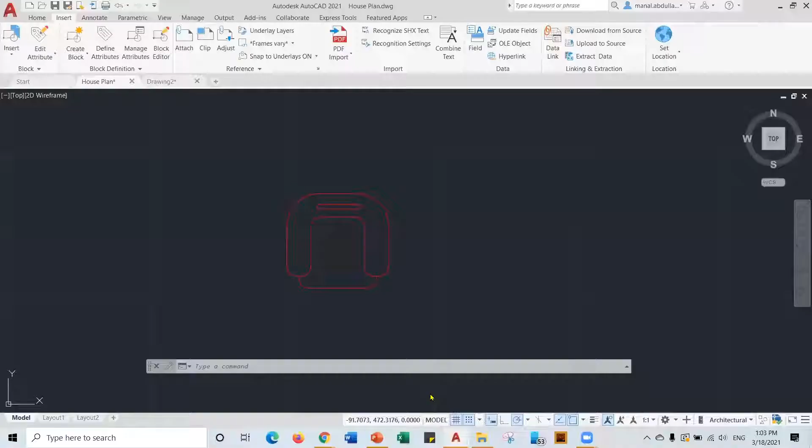At the beginning, I've created here a little armchair, and I need to use this armchair in my house plan, in different rooms. The best way to use it is to copy it, but when we copy it, if we need to control it, like change one of them, we cannot change all of them at once. So having a block means grouping it together into one reusable object, to reuse it in this drawing or other drawings. Let's see how we can define blocks.

The first thing we need to do is go to the Insert tab, and here is Create Block. We have two options: Create a Block, or Write a Block. Create a Block will create a block inside the drawing you are using, so this is a local block. However, Write a Block lets us create a block globally to use with other drawings.

Let's start with the first option, Create Blocks. That opens a dialog box for you to give it a name, so here I'm going to name it armchair. Specify the base point — we have two options, specify on screen or pick points. Let's use pick points, so this is the base point. The base point is any significant point in your drawing; it could be any point, but try to make it meaningful for inserting the block. In this case, I'll use object snap and take the midpoint.

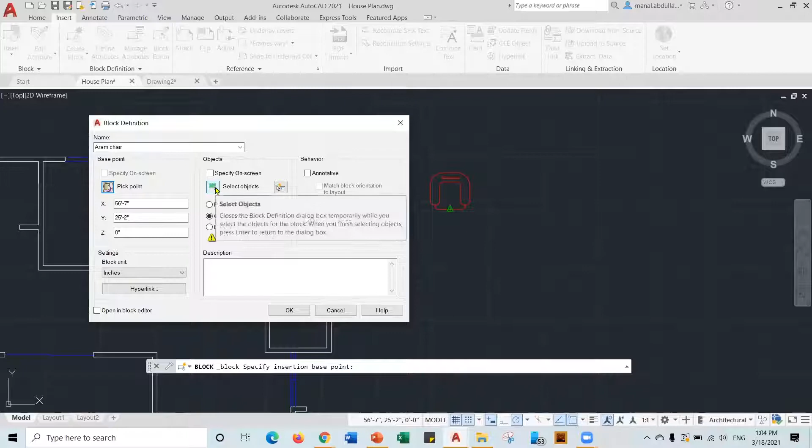Then go to the next option, which is Object — select object. I need to use any selecting method to select the whole segments, the arcs, and everything I need to convert to a block. When I finish selecting, I press enter to finish.

We can change the units. Here the units are inches, but you can change that if needed.

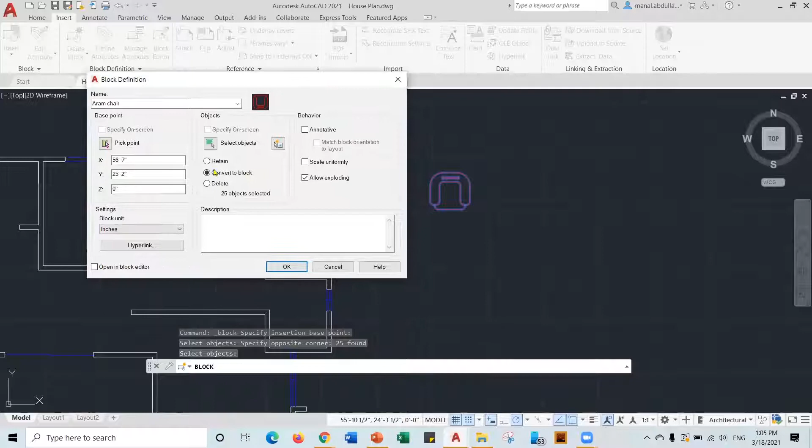Here we have three options. The first option is Retain, which keeps the chair as segments — lines and arcs — so it won't be a block itself, but the system will still create a block for you while keeping this as lines. The second option, Convert to Block, will turn this into a block in the library. The last option will delete this from the drawing and create a block for you. Now, as you see, we have 25 objects selected, with lines and arcs and everything. I'm going to choose Retain, so I'll keep this as lines.

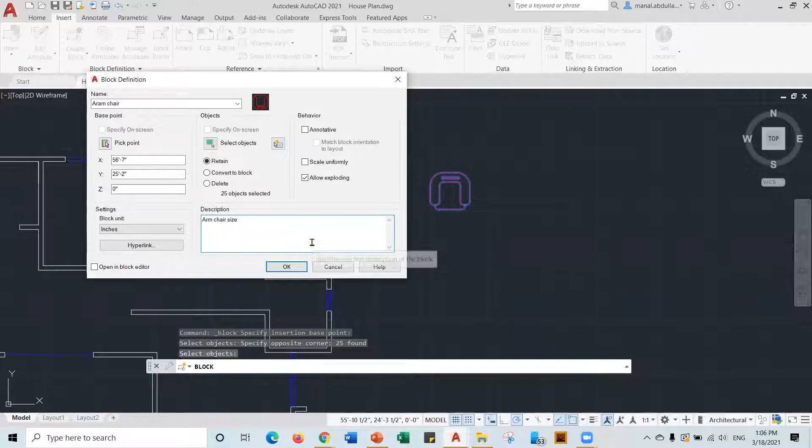You can put any description you want here, like 'armchair,' and you can include size or any necessary information, then click OK.

As you click here, notice that because we chose the Retain option, this is not a block yet. However, if you go to the Insert tab, Insert, here we have the armchair — click on it, drag and drop it into place. Now this one is a block, and you see it has just one grip. However, this one has a lot of grips because it's still made of segments. So now this is a block, and you can insert it as many times as you want.

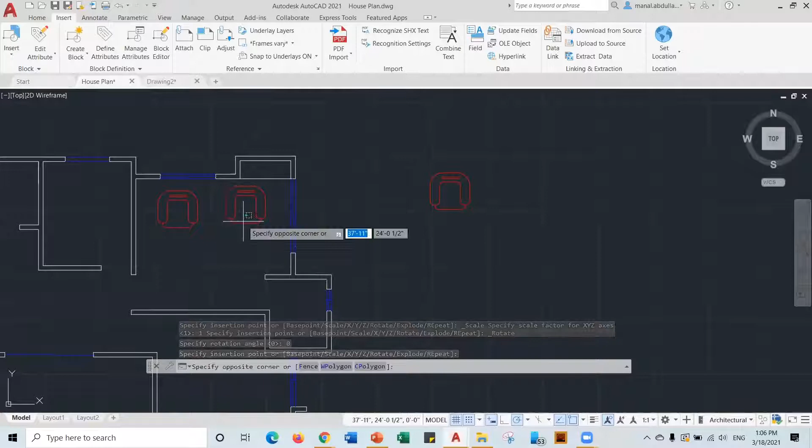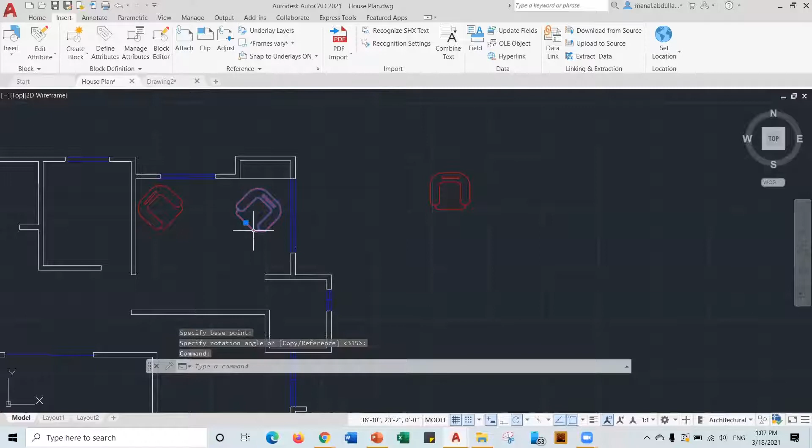Now if you right-click on the block, you have options — you can rotate it. If you need to rotate, you pick a point and decide where you want to put it. You can also scale it, make it bigger or smaller. Let's rotate this one: pick a point, then rotate and select that. You can also move it — from the grip, you can move it up and down. So this is how you can create this furniture.

Now let's say I need to create another block. I'm going to make some changes here — stretch it, open the green window, right-click, and stretch this side. Let's turn that into a sofa. So I'll stretch it and save it as another block.

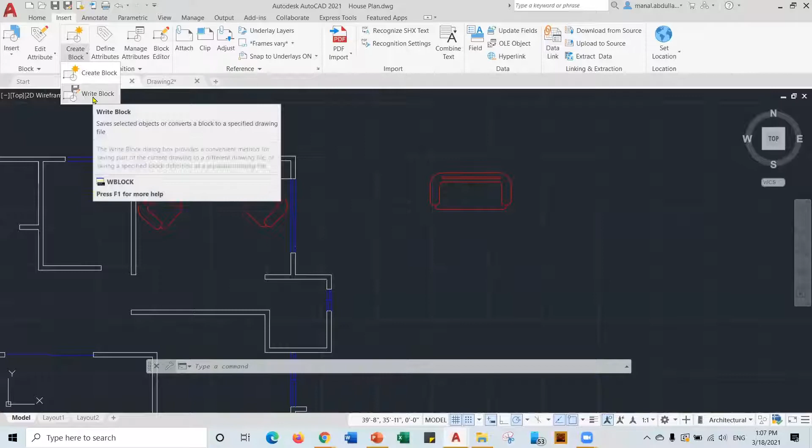Now I'm going to use the second option, Write Block, and let's see the difference. If I already have a block, I can choose the first option. Like if I need to make the armchair, save it as a block, we can make it. If you need to save the entire drawing, you can choose the entire drawing.

Otherwise, you can go to objects and pick a point. This is the base point. Remember, a lot of learners mix up this point. The base point should be a significant point inside the object that you need to insert. Sometimes you pick a point far away, so the base point will be far away and you'll find difficulty controlling the block.

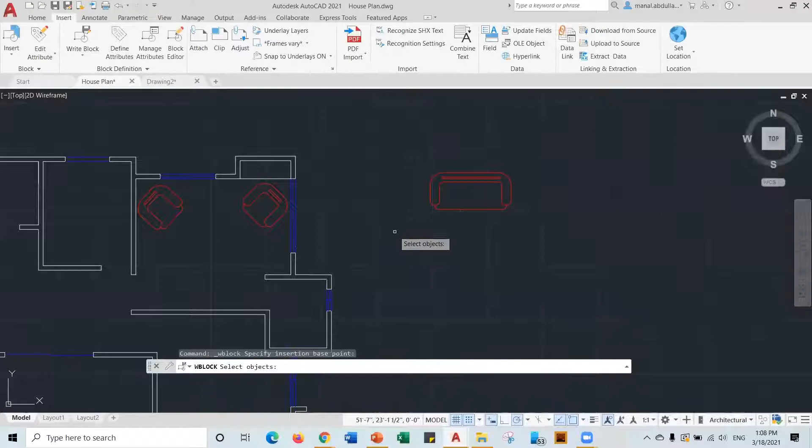So pick a point that's significant to the object. Select the object, select everything, and hit enter to finish selecting. Now again you have retain, convert, and delete. If you convert it, this one will be a block as well. If you delete it, you no longer have this one on the screen, but you have a saved one.

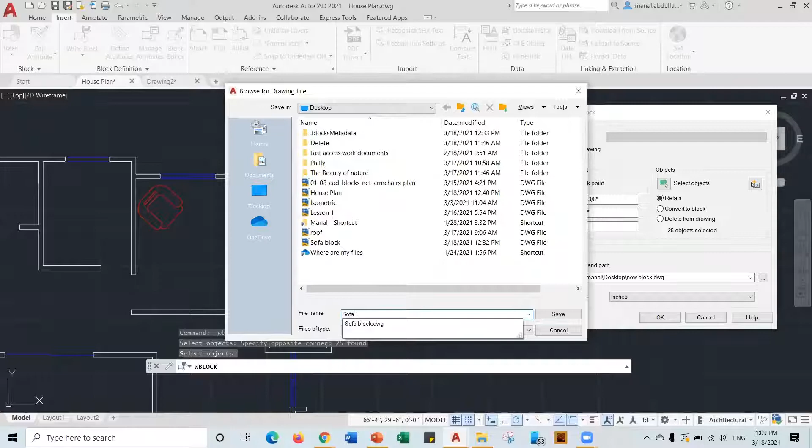I'm going to keep that as retain, because I need to use it for attributes in this example, but you can choose any other option. Here you need to decide where you want to save this block, because this is a global block and you can save it on your computer. So I can open browse, and here I give it a name, like sofa one, or whatever the name. Click OK.

Now, as you see, because of retain, it's still lines, but if I need to bring it from there, it's not in the library because I didn't create it like the first one. So I need to bring it to here. I need to import it to this drawing.

Blocks from libraries, you browse, click on this little icon here, and browse, go down, and here's the sofa one that I created. Open, and it will come here. Now you can bring it to your drawing. Okay, now this is sofa one.

So feel free to deal with the blocks like any other objects. You can move it, rotate it, and scale it if you want. If this is too big, you can scale the block to a reference or scale it any other way.

Now, after that, if you do have the tool palette, remember we talked about the tool palette before. If we go to View, this is the tool palette, or just type tool palette on the command line, and here's the tool palette. I have some blocks here that I created before using the furniture. You also have some other blocks you can use.

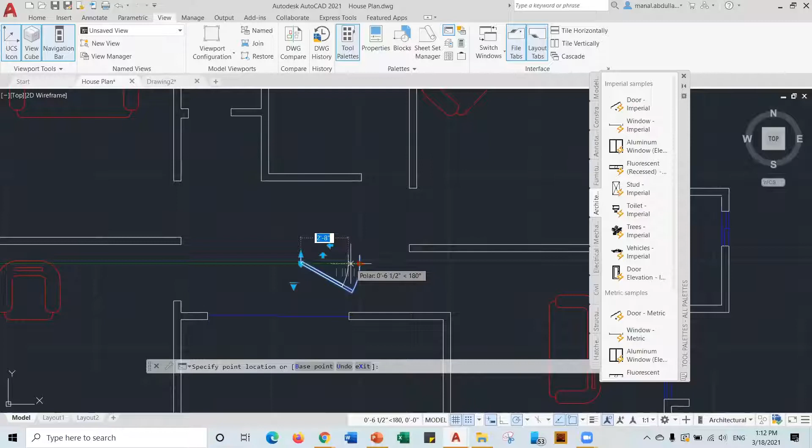For example, if you need architectural elements, like a door, you can bring it in. This is a dynamic block that you can resize, and you can use the options here to resize it to match the dimensions you need. You can change the door opening, flip it, and then move it to the correct place. Okay, so here you go.

So you can do anything you want with dynamic blocks, as well as any other blocks. You can bring them into a space, and here you go. You can change this dimension and put it in the correct place.

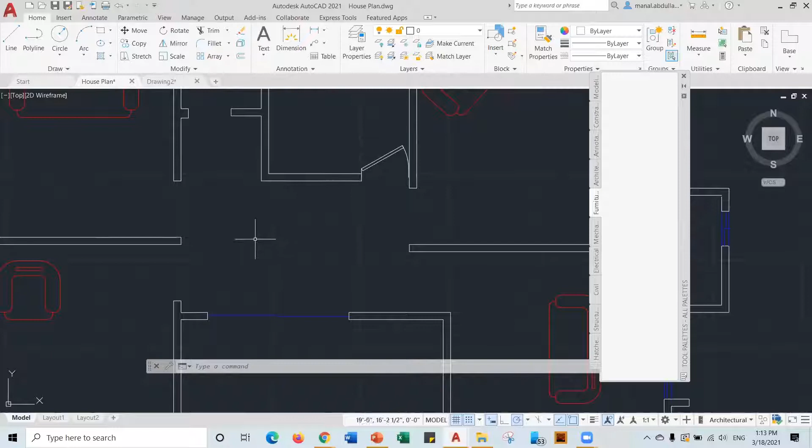Now, if I need to create something like a new tab, like I did here, I will delete this palette and show you how to make it. So you right click and make a new palette and give it a name. After that, you have the tool palette. Then you need to save your drawing, so make sure your drawing is saved.

After that, you can go to the Insert tab. Recent blocks, and you can drag and drop from the recent blocks to there, and you can add as many blocks as you want. Now after that you can close the blocks, and you will find them under the new tab.

If you need to change that, you can move it up or down. Like if you need to move this tab up, you can do that, or down. Also you can create a new one, delete it, or rename it. So here you can just organize your blocks.

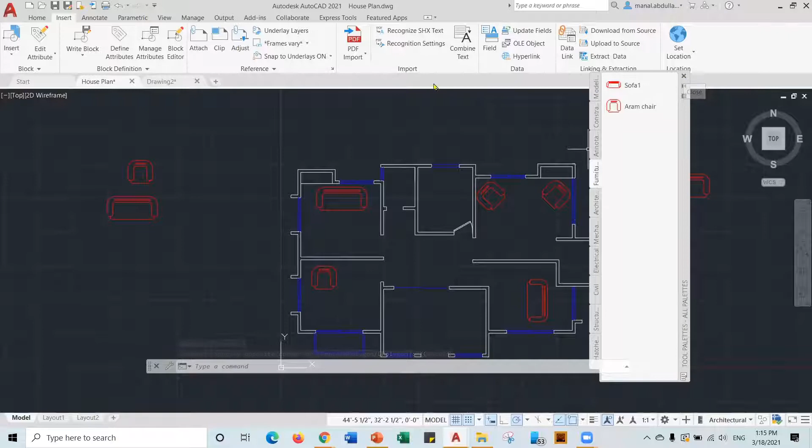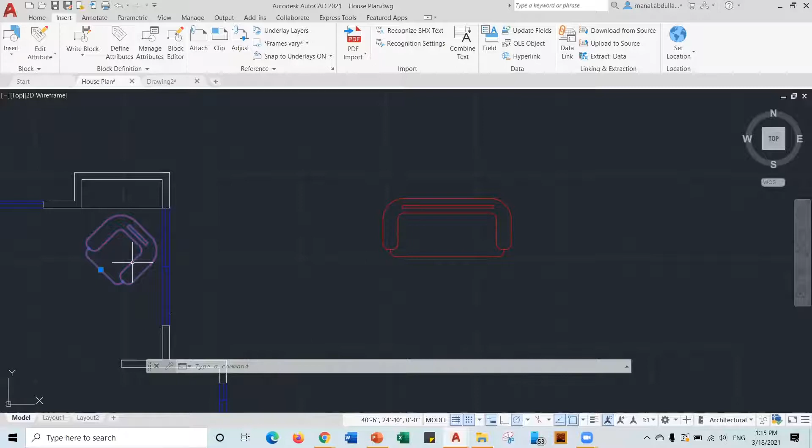Now after that, what you can do is define attributes, and this is something I'd like to talk about today, how to define attributes. Attributes are information that you can put inside the block to give details. For example, here, if I click on this block, I don't have any details, like what color, what size, what model number, which room it's in, which factory made it, or whatever the price. I don't have any information. If we need to make our blocks with more information and details about each one, it's a good idea to add attributes. Let's see how to make attributes and labels for our blocks.

The first thing, I still have here the lines, so it's not blocks yet. So the first one.

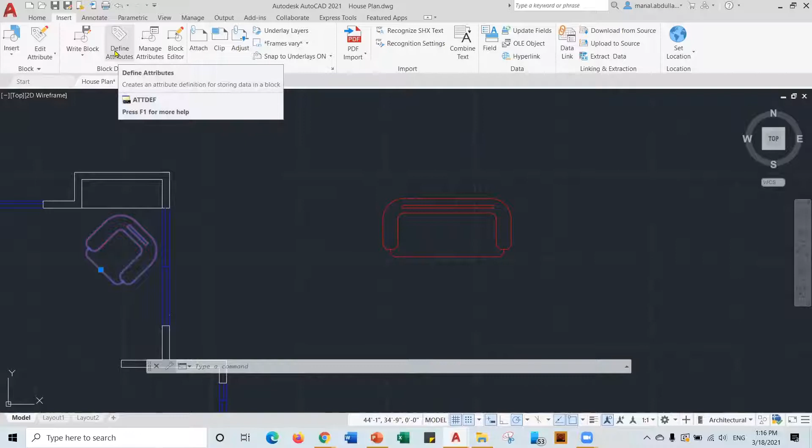After that, I can go to Define Attributes, and here we will open the dialog box. The first thing you need to give is the information. What tag, like what do you want to appear on top of it? Let's say I need the tag to be the model number.

The information here is completely up to you. If you have a door, what's the door name, what room, what size, what factory, any details about it, the prices, the colors, made of wood or something else. It's completely up to you, you can put any information about it. The prompt.

Remember, in the tag name we cannot put spaces, but we can put capital letters, or underscore, or slash, dashes, or other things. But we cannot put spaces.

By default, the model number, if you need to put hashtags, like how many places, if they are 3 numbers, how many digits. Justification, I'm gonna make middle center. If I click on the point, that's the middle center of the number. Here the text height, if we already have a text style set up, you will get the text height from the text style. Otherwise, if there is no text style set up, you can put any number. And here the rotation, if you need to put it, let's make it 0.

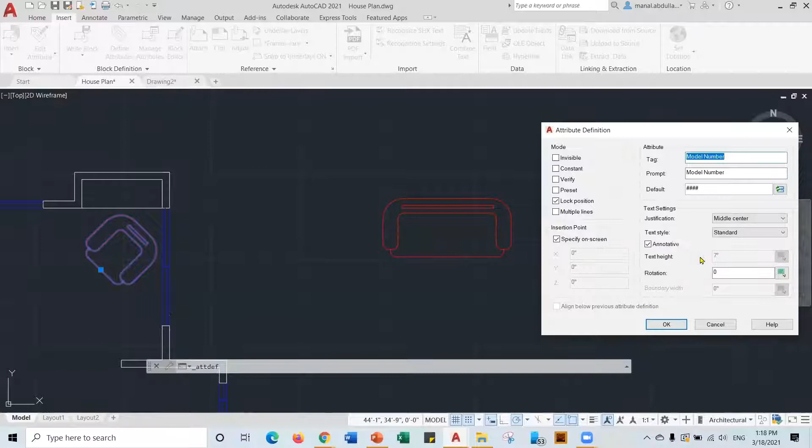Then I'm gonna put OK, and here you go. Now I will click on the middle, and as you see, the point that I picked is the middle center, because I chose the justification as middle center.

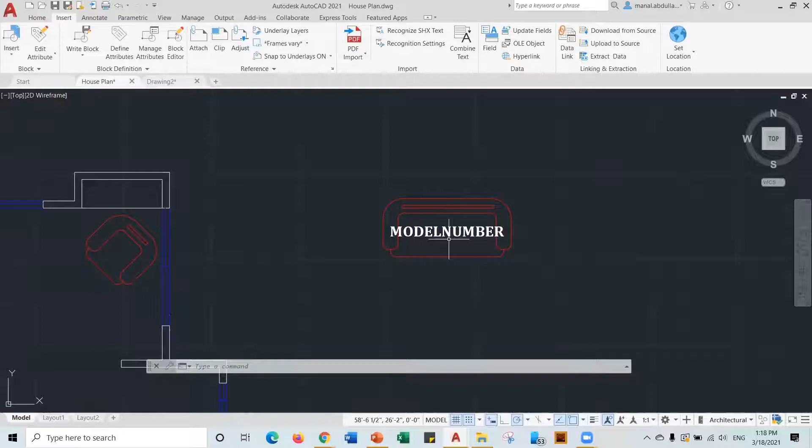Now let's make another attribute. You can add as many as you want for each single detail of the furniture, door, or block that you are creating. Let's make this invisible, so I don't need a lot of information on top. I can choose which information I need visible and which one not.

Now here the tag I need, for example, is color. And the default, let's make it brown. So you can put something for defaults, or just put a dash or anything else. I need it to align below the previous attributes, so I don't need to select everything for now. I click OK, here's the second one.

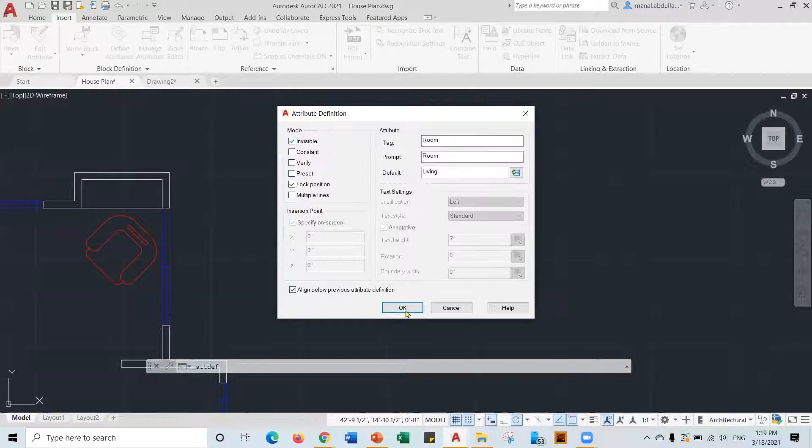Let's make another one. After the color, let's make a room, like which room you want it to be. By default, let's make it living room. Also let's make that aligned and invisible. So I created 3 for now. If you need to create more, each one can have information about it.

Now, after creating these attributes, you need to create a block. So you go to Write Block from the Insert tab, Write Block, Create Block. Under that, Create Block, or B, Enter. Now here we give it a name.

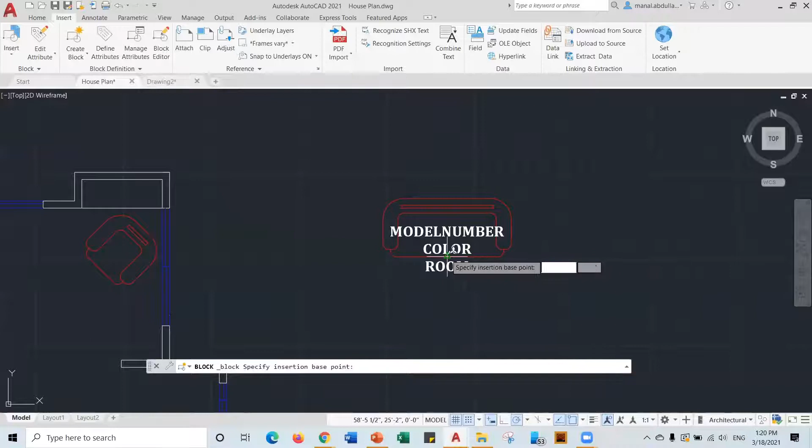Sofa attribute, or any other name you'd like. Pick point, the base point. Again, the base point is important to be part of the block or some significant point. Now, after that, if you need to convert that to a block, you can go ahead and convert it to a block.

Otherwise, you can retain it, so keep it as lines and segments, or delete it. If you decide to delete, this one will be deleted, but you can actually find it in Insert Blocks.

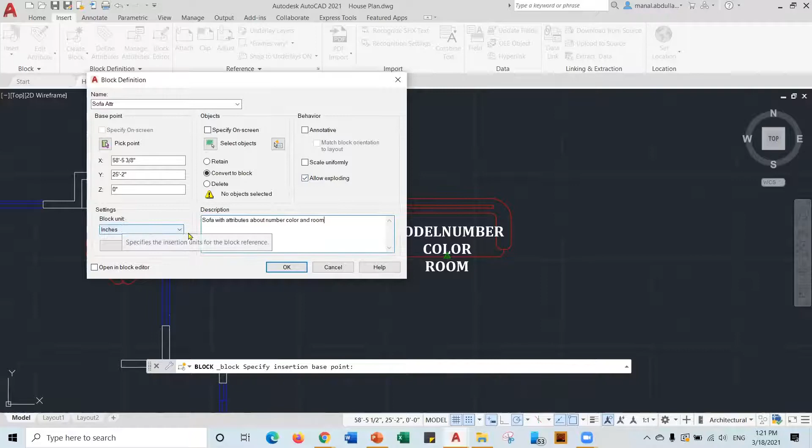You put a description like sofa with attributes about number, color, and room, any details that you find helpful. You can allow exploding, just to give this an option to explode and make it into pieces again if you would like to. If you need to change the units again, you can change that at this place, then hit OK.

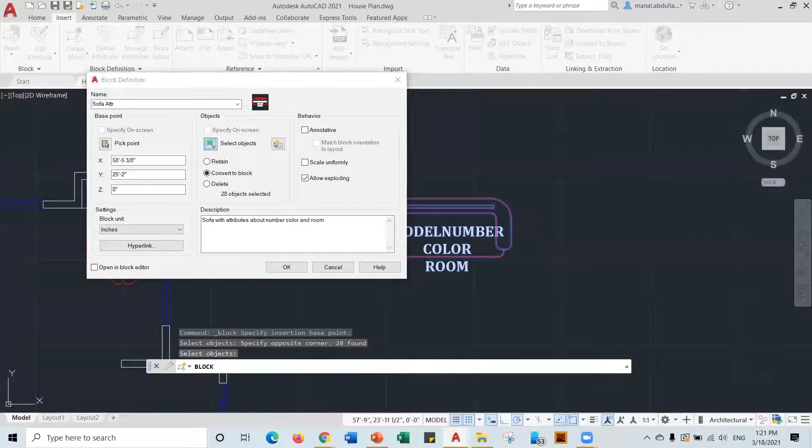And this is the select objects. You select everything, including the attributes. Do not forget to select the attributes, then enter. At this point, I think we're done. Here we select object from this one, but we didn't do that before, so the program will ask us. So you can click select object, then click everything, enter, and here, OK.

Now, as you see, we opened the attributes, and this is the room number, the room, and the color, and the model number. Remember that we made the model number visible, the room and the color are not.

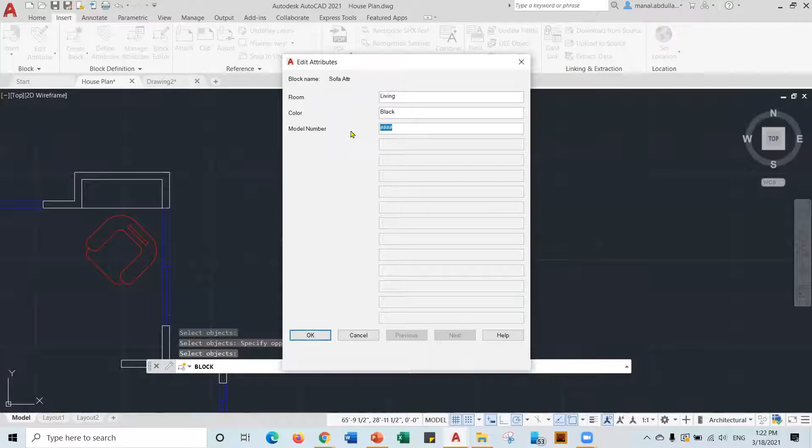Now let's change that. For example, if I need that black, I need the model number 1, 2, 3, 4. Hit OK. Now this has 1, 2, 3, 4, and I know this is the model number. Now I'm gonna delete this and delete this.

I will go here and insert the one with attributes. This one doesn't have any attribute or information with it. However, this one has attributes, and I can put it there.

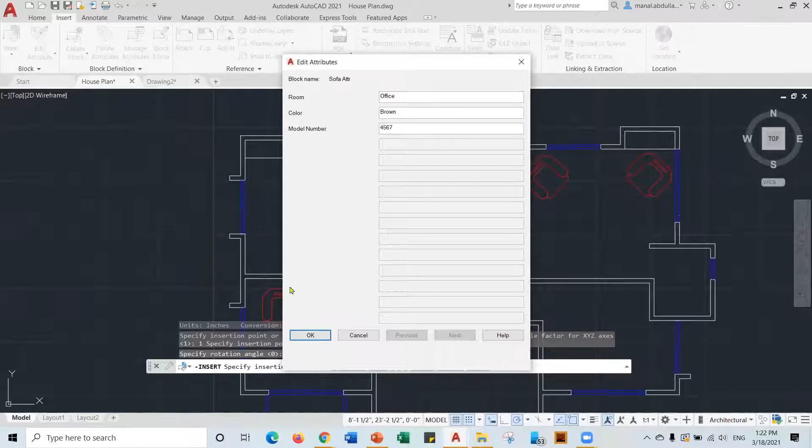When you insert it, that will open automatically and ask you for the information to fill in. So let's say I need that for the office, color brown, and number 4, 5, 6, 7. It's a different one, not the same. So here I have a sofa, but this model number is different than this model number. This is a very good idea when you put the sofas, to just ask you.

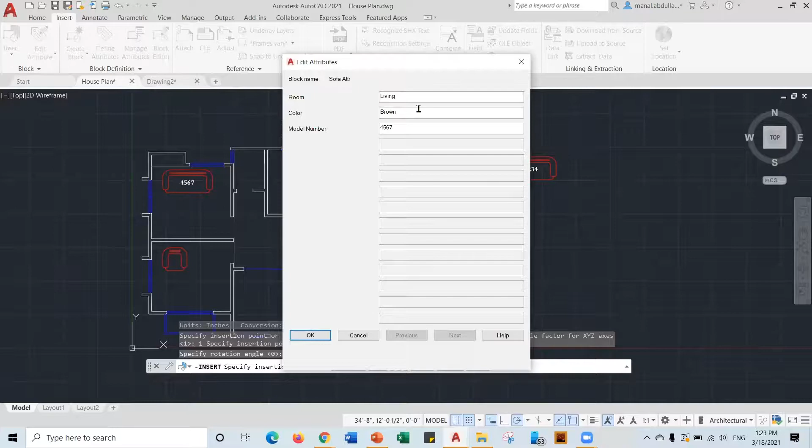Anytime you insert, you get the same questions, and you put different numbers, or maybe the same number. Like if I need the same number 4, 5, 6, 7, so it's the same. And I can put a different room, and keep the same color or a different color. So here you decide what you want.

After inserting them in your drawing, you go to manage attributes, and you see what I have, like the default with the living room. This is the attributes I created: living, I have the color, the room, the prompt, the model number. This is the tags I created.

If you need to change any of these tags, you can do that. Double click on it and that will open it. The first tag we had is room. If we need to make it visible, we can do that. Let's make that visible and hit OK. And the model number, I'll make that invisible, so I don't need that to be visible. Then apply and OK.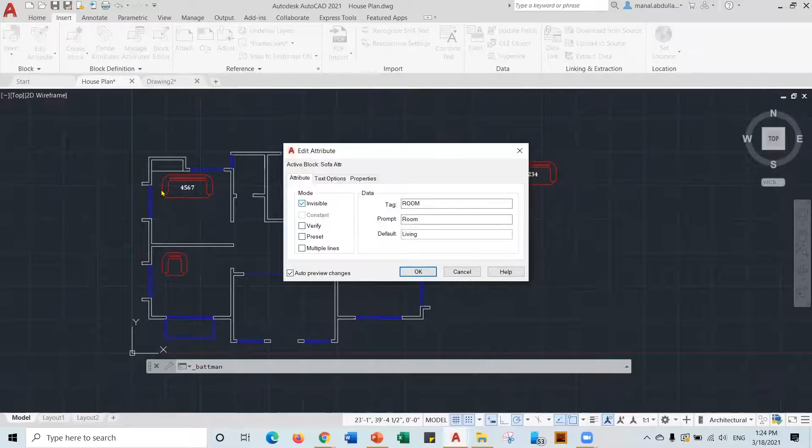If you need to change it back, you go to manage attributes again. This is the model number — I click on it and make that visible. And this is the room — I make this invisible. So you can decide which ones even after you're creating the block. Then apply, then OK. So here I get that back again.

Now the last thing I need to talk about today is how to edit an attribute and how to edit a block. So if you created a block with attribute or block without attribute definition, here's what you can do if you need to edit it.

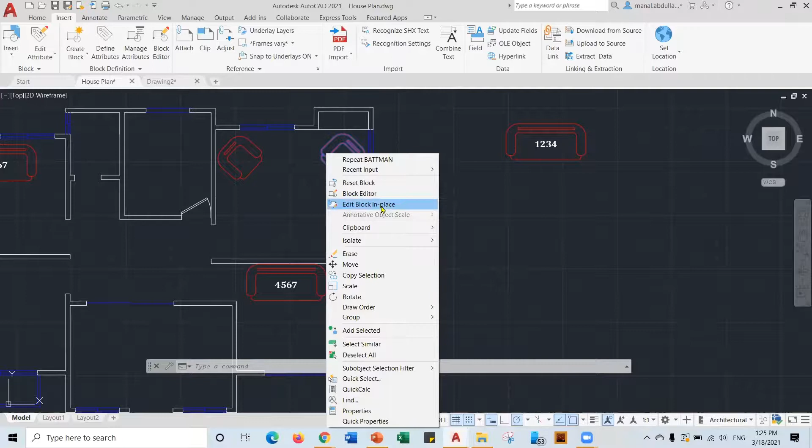If you click on any block, you have different options when you right click. Left click to select it, then right click. You have two options: block editor and edit block in place. If you go with edit block in place, I click on that and select the name. Now you can edit that block.

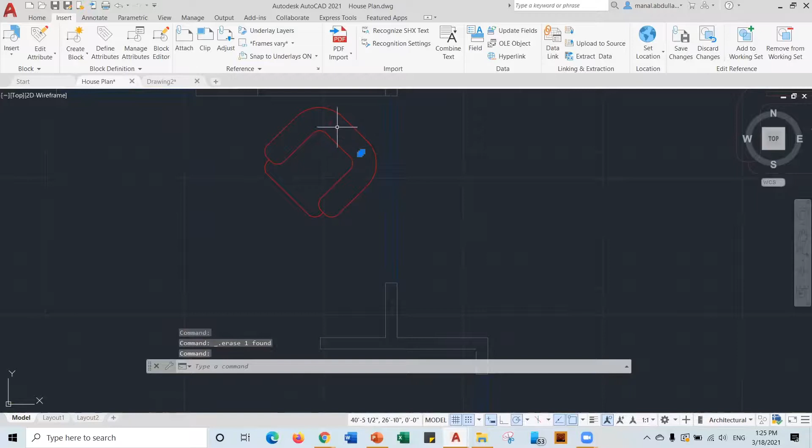Let's say I need to delete these lines. I don't like them, so I just need to delete them. After deleting, see now it's isolated in the drawing. After that, we need to save the changes. You go here, save changes, and you get a confirmation, saved. As you see, these lines are deleted from this and this because they're related to the main block, which is actually there. And this one doesn't have any lines anymore.

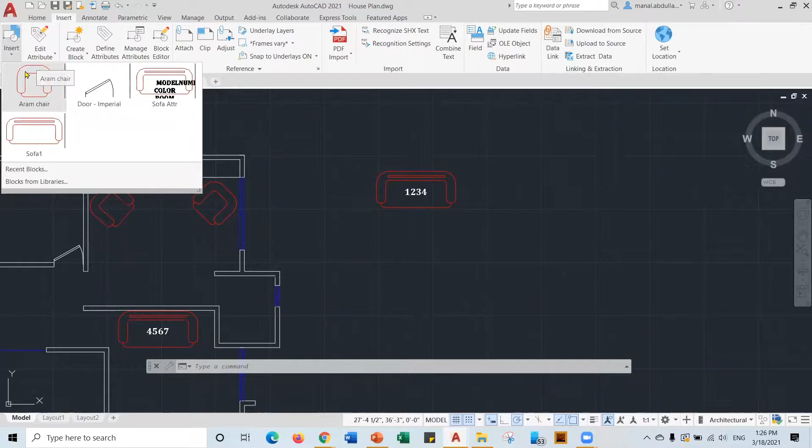So this is the power of the blocks — you can edit all of them at one click. Another way to edit a block: the first one was edit in place, now let's talk about the block editor, or edit attributes if it has attributes. You can edit from here, block editor.

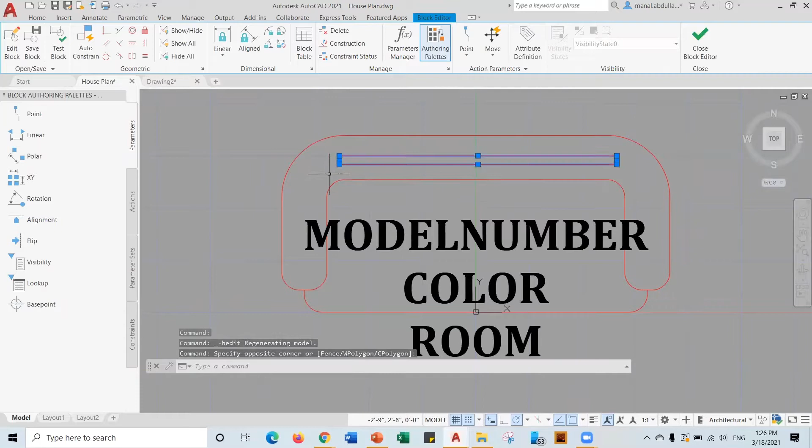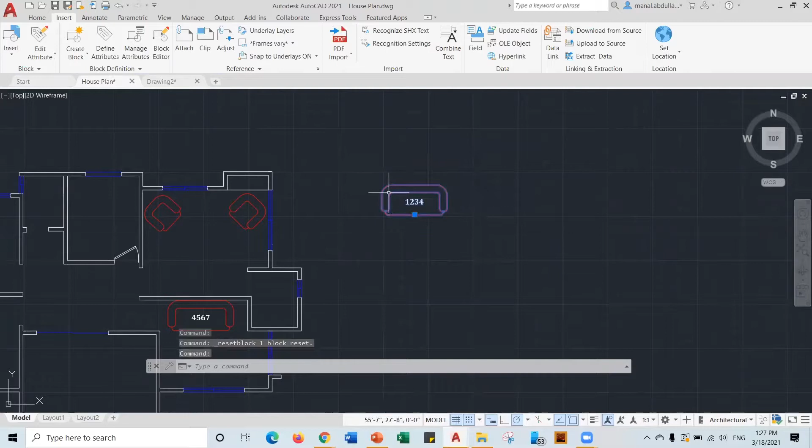Let's say I need to delete these lines as well. I can delete, close, save, and here you go. So even if you created a block, you can still edit it and go to the block editor or edit block in place. Reset a block will bring it back again — if you make any changes, you can reset it to normal.

Edit attributes: here you can click on any of them. Let's say the tag is room, and I put living. If it's not living, it's office, I can change that to office and click apply. That will make these changes.